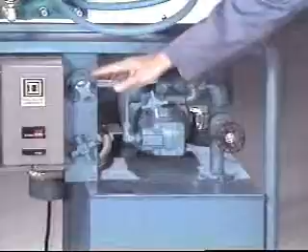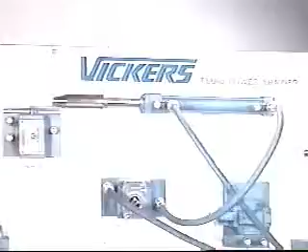Hydraulic circuits, even the most complex ones, are made up from a surprisingly small number of different components. Here on our fluid power trainer, for example, I've set up a circuit that includes a vane-type pump, a relief valve, directional valve, flow control, and cylinder. This type of circuit, with its slow feed forward and rapid return, can be found on any number of machines.

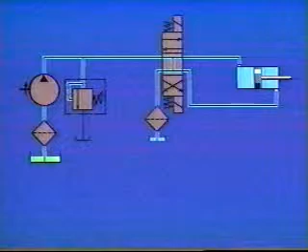Now, we'll need something to drive the pump, and that can be anything you select, from an electric motor to a windmill, as long as it can provide the necessary torque and proper drive speed.

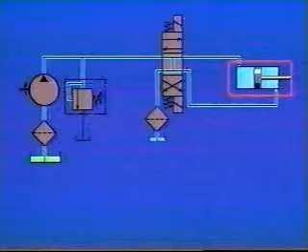If this were a circuit for a grinder, we might have a problem. The table would move faster in one direction than in the other because of the differential areas in the cylinder. A simple fix would be to use a double-ended cylinder. Then the speeds and forces would be equal in both directions.

Now, there's another way we could get the same results. It's called a regenerative circuit. For equal speeds and forces, a cylinder with a 2-to-1 area ratio is used. That means with the piston retracted, the fluid in the rod end would be half of what's needed to extend the piston.

To make it work, fluid from the rod end, instead of going to tank on the extending stroke, is routed back to the inlet side of the directional valve and from there into the cap end. This means we will have equal pressure on both sides of the piston. But the greater force on the cap end, because of its larger area, will cause it to extend.

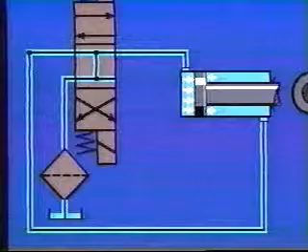Since the fluid displaced from the rod end provides half of the fluid required to extend the piston, the pump needs only to supply the other half, and it will only take half as long as it would in a conventional circuit. No, we didn't get something for nothing. Pressure in the rod end resists the forward travel, so what we gained in speed, we lost in force.

If it were necessary to regulate the speed of the cylinder piston, this would be a good application for a bleed-off flow control. The workload is fairly constant, and there's no tendency for it to run away. We would save some energy, too, in that the pump would operate at the workload pressure rather than at the relief valve setting.

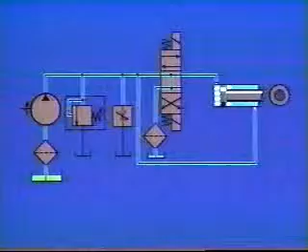Now, it's often necessary to have two cylinders which operate in sequence. That is, one must complete its stroke before the other begins. An example might be a clamping cylinder and a work cylinder. Naturally, we'd have to clamp first, but fluids take the course of least resistance. And if the work cylinder moved easiest, we'd be in trouble.

Such an application calls for a sequence valve, which will not only assure that the clamp moves first, but also maintains sufficient pressure to hold the workpiece as the second cylinder approaches. This time we'll use a single directional valve to control both cylinders. The sequence valve, which is held closed by an adjustable spring, will prevent flow to the work cylinder until the clamp is firmly in position.

When pressure reaches that required for clamping, it will overcome the sequence valve setting and permit flow into the work cylinder. Pressure in the clamp cylinder will be maintained at the sequence valve setting regardless of how easily the work cylinder moves. However, as pressure in the work cylinder builds up beyond the sequence valve setting, the clamp pressure will also increase.

Sometimes, to avoid crushing the workpiece, a pressure-reducing valve is used to limit clamping pressure to a safe maximum. A pressure-reducing valve is held in its normal open position by a spring and is closed by pressure sensed at its outlet port. With the sequence valve and a pressure-reducing valve added to our circuit, we can not only cause one piston to move before another, we can maintain pressure on it between set minimum and maximum levels as the second cylinder performs its function.

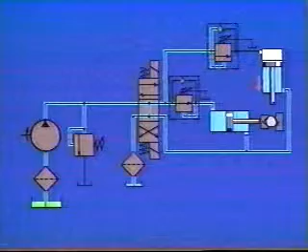Now, let's try a rapid traverse and feed circuit. They're quite common in machine tool applications for drilling, tapping, and similar functions.

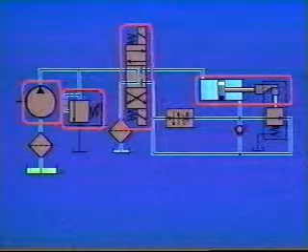Since the work will be done on the extending stroke, we'll use a long cylinder with a single rod. In order to be able to stop in mid-stroke, we'll need a 3-position directional valve, which is spring-centered with at least the cylinder ports blocked. Next, a large volume pump to provide the speed we'll need in rapid traverse, and the ever-present relief valve. Have you noticed these are the same basic units we used before?

This time we'll put a flow control in the exhaust line from the cylinder. A drill might pull ahead as it broke through the work, so a meter-in or a bleed-off circuit wouldn't do. We now can control the cylinder speed during its entire extending stroke, but that's not quite what we want.

We need to move up to the work quickly, then slow down just before the drill contacts the work. To do this, we'll use a cam-actuated shutoff valve that's normally open. Its proper name is a deceleration valve.

We'll place it so it can be closed by a cam on the cylinder rod and pipe it so flow can bypass the flow control during the rapid approach to the work. By properly locating the cam, it will cause the piston to decelerate and feed into the work at the flow control setting. Both flow controls and deceleration valves are available with integral check valves for reverse free flow.

But we'll place one here for the sake of clarity. It will bypass both valves for a rapid return stroke.

As we mentioned, this circuit is typical of many applications where a large volume of fluid is required at low pressure to move quickly up to the work. Then, only a small volume at high pressure is needed for the work portion of the cycle.

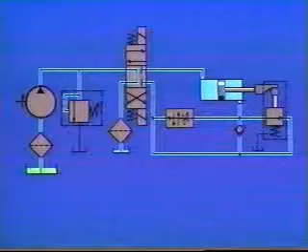With a single pump selected, the bulk of its delivery is not being used during the feed portion of the stroke. As a result, it returns to tank through the relief valve at its setting, and a great deal of energy is wasted. I might not have mentioned this if we didn't have a fix, but luckily we do.

It's called an unloading circuit, and it uses 2 pumps, one large and one small. The small one needs only enough volume to supply a little more fluid than our system requires at high pressure. The large pump will help out when the going gets easy, during rapid approach and rapid return.

To complete our package, we'll need an unloading valve and a check valve. The 2 pumps, piped together, will replace the single pump and provide the large volume required at low pressure.

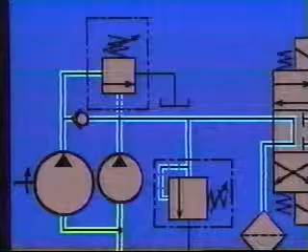When the pressure builds up, as it will when we go into the work portion of the cycle, the unloading valve opens, permitting the large pump flow to return freely to the reservoir. The small pump, however, cannot get through the check valve and continues to operate up to the relief valve setting.

As the cylinder piston returns at low pressure, the unloading valve closes and the large pump again joins the small one for a rapid return.

Come to think of it, we not only save energy with this circuit, we can usually get by with a smaller electric motor. With a single pump, the motor has to drive its full volume up to the relief valve setting. Using 2 pumps, the motor drives the combined volume up to the unloading valve setting.

The large pump delivery then goes to tank at little or no pressure, and only the small pump goes to the relief valve setting. Now, how about another application?

A hydraulic curing press. Here again, we'll need a lot of oil to close the press quickly, then a small amount at high pressure during the curing cycle. Sounds like another good application for an unloading circuit, and it is.

But we're going to try another approach, an accumulator, a device for storing oil under pressure.

First of all, we're going to need a pump, relief valve, directional valve, and a cylinder. If we select an 8-inch diameter cylinder, it will have an area of 50 square inches, and at 1,000 psi will develop a force of 50,000 pounds or 25 tons.

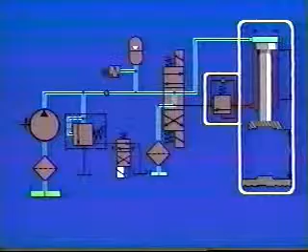We're able to open and close the press and build up to 25 tons of force. But to hold it for several minutes would have our 20-gallon per minute pump running at 1,000 psi, with most of its delivery going back to tank through the relief valve. And that's not practical. We'd be wasting nearly 15 horsepower.

Now, this is where the accumulator comes in. We tee the accumulator off our main supply line between the relief valve and the directional valve. It has a bladder in it, something like the one in a football. Next, we'll pressurize or preload it with dry nitrogen to about 600 psi.

This time, when the press is fully closed, instead of going over the relief valve, the oil will start filling the accumulator from the bottom and compressing the gas even more. By sensing the pressure with a pressure switch, we can actuate a small solenoid valve and vent the relief valve when the pressure setting is reached.

A vented relief valve opens at very low pressure, permitting the pump to flow freely back to the reservoir. A check valve placed upstream will prevent backflow from the accumulator, and the compressed gas inside will maintain pressure in the rest of the circuit.

Any drop in pressure can be sensed by a pressure switch, which at some predetermined minimum pressure will energize a solenoid valve and devent the relief valve. The pump flow will again be directed into the accumulator, but only long enough to replace the fluid lost through leakage, and the cycle will repeat.

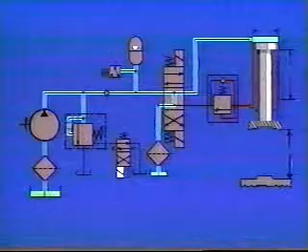In this way, the pump will operate under pressure for only a few seconds during the entire curing cycle.

Well, looking back, we've discussed a simple reciprocating circuit, a regenerative circuit, a sequencing circuit, a traverse and feed circuit, an unloading circuit, and a hydraulic press circuit using an accumulator. That's 6 circuits in all, each quite different from any other.

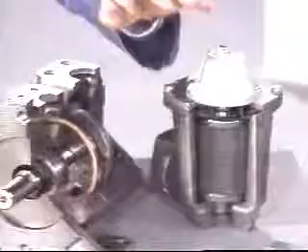Now, let's see how many different hydraulic components we used. Reservoirs, common to all circuits. Filters, they'll pay for themselves. Pumps, the heart of the system. Relief valves and pressure-reducing valves for overload protection. Directional valves control the motion. Cylinders provide the motion. Check valves, one-way directional valves. Flow controls to regulate the speed.

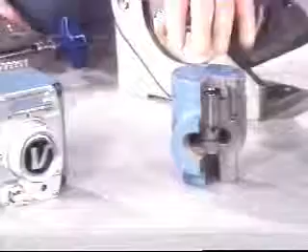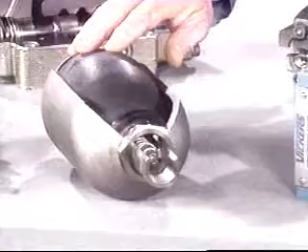Deceleration valves for smooth transition from rapid advance to feed, accumulators for storing oil under pressure, and sequence, counterbalance, and unloading valves. We've grouped the last 3 together because they're essentially the same valve using different controlled pressure sources and either internal or external drain connections.

Actually, we've merely scratched the surface of the many possible applications for hydraulic systems. Once we know the motions, speeds, and forces required, it's a simple matter to select the necessary components to provide them. You're probably already thinking up projects of your own.

Why not start with a log splitter? You now have the knowledge.